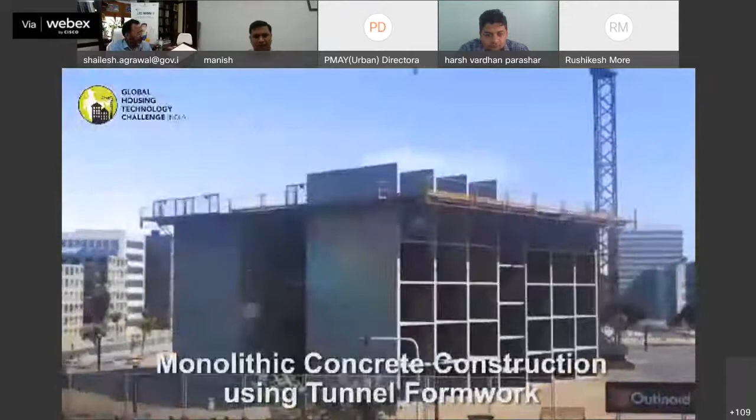Ministry of Housing and Urban Affairs, Government of India, has initiated the Global Housing Technology Challenge India to identify and mainstream best available global technologies so as to bring a paradigm shift in the construction sector. 54 innovative technologies put in 6 broad categories were shortlisted during the challenge process. 6 lighthouse projects at 6 locations with 6 distinct technologies are being constructed. The lighthouse project using monolithic concrete construction technology with tunnel form, consisting of 1144 units in S+13 configuration, along with all basic and social infrastructure facilities, is being constructed at Rajkot in partnership with the State Government of Gujarat. The Honorable Prime Minister laid the foundation stone of 6 lighthouse projects, including at Rajkot, on 1st January 2021.

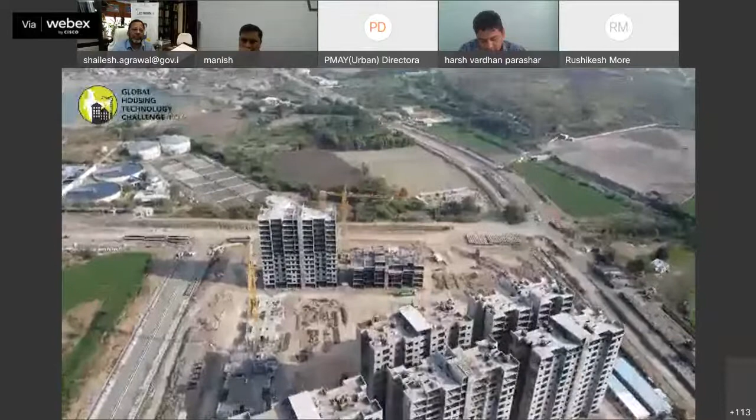Work on Lighthouse Project Rajkot has started across all 11 towers, which are now in different stages of construction. This video briefly shows the progress of this project till date, an already established system for building construction in many countries.

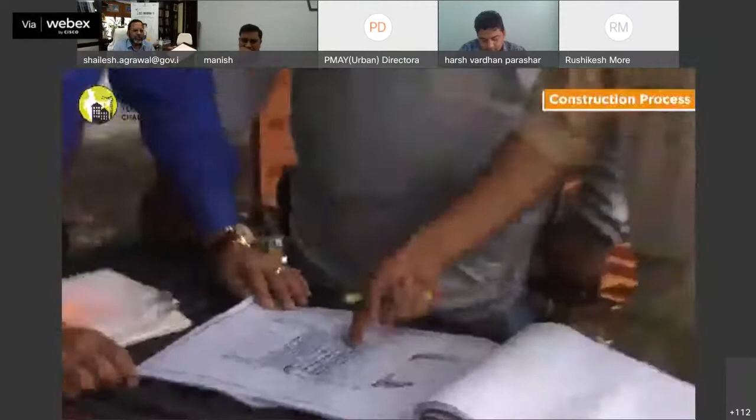Monolithic concrete construction system replaced the conventional steel or plywood shuttering formwork system with a customized engineered system. Two half shells made of steel are placed together to form a room or shell, and several such shells make the apartment. In tunnel form system, walls and slabs are cast together monolithically in a single day.

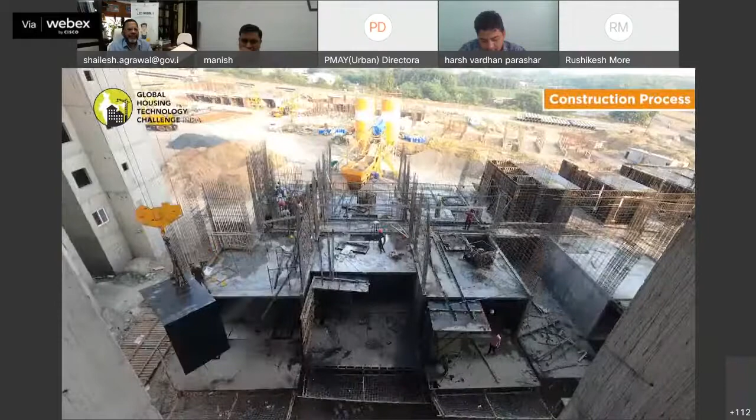Tunnel forms are used over foundation with necessary reinforcement, walls and slabs cast together using designed concrete. The sequence of construction includes stripping of the formwork from the previous day, its positioning for the current day's phase, installation of electrical and plumbing services, placement of reinforcement for walls and slabs, and then concreting.

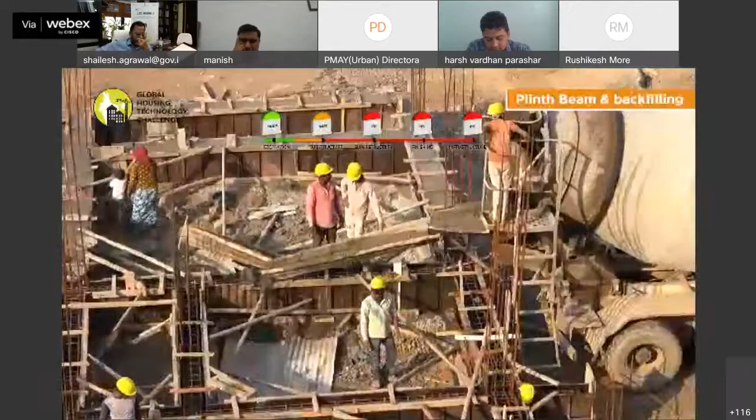Construction of LHP Rajkot started with excavation of the site, which was mostly rocky, removing boulders and soil, followed by laying of plain cement concrete, footing work, shear wall, casting of plinth beam, and backfilling of the substructure.

As the substructure was completed in a tower, superstructure work was started by placing customized sets of tunnel forms simultaneously with reinforcement and placement of service pipes as per design, and then pouring concrete to complete one floor in a day.

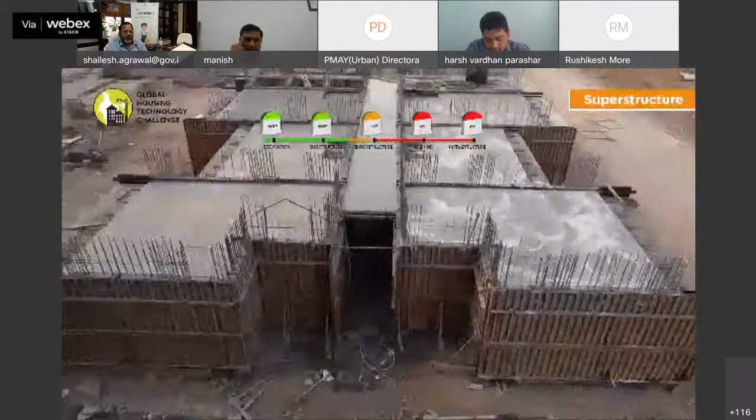Following the same process, casting of 8 out of 11 towers have already been completed, and work on the remaining 3 towers is in different stages.

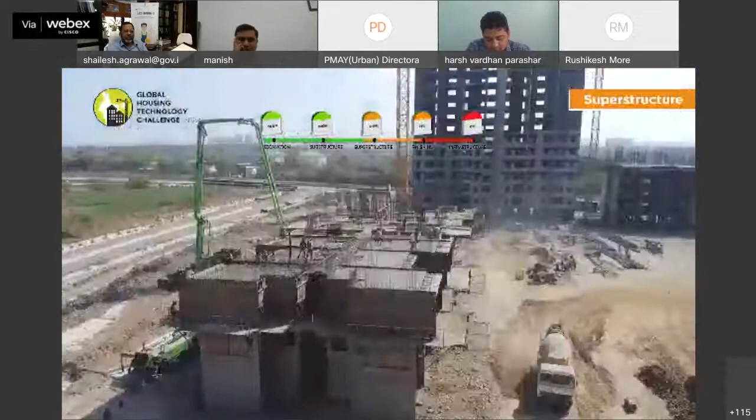While the superstructure is progressing in different towers, masonry work using AAC blocks, construction of stairs, fixing of electrical and plumbing services, lift installation, fixing of door and window frames, internal and external plasters, and painting are being done in a planned manner. Simultaneously, infrastructure works of drainage, sewerage, internal road, underground water tank, and construction of compound walls are also going on.

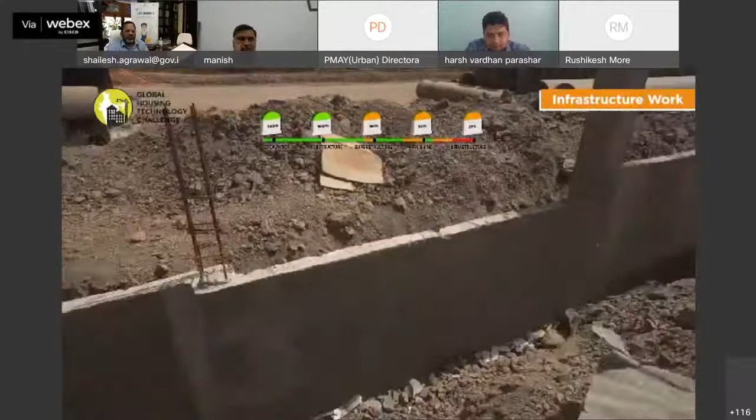Construction of social infrastructure including Anganwadi, shopping complex, and community center are also going on in full swing. A sample flat with all amenities in Tower 8 is ready for showcasing to beneficiaries and other stakeholders. With completion of about 70% of the work, the project is likely to be completed very soon for handing over to already identified beneficiaries.

The Lighthouse Project Rajkot is serving as a live laboratory for learning and knowledge dissemination. About 300 Technograhis and other stakeholders have visited the site to learn the use of innovative technology in a real project at site.

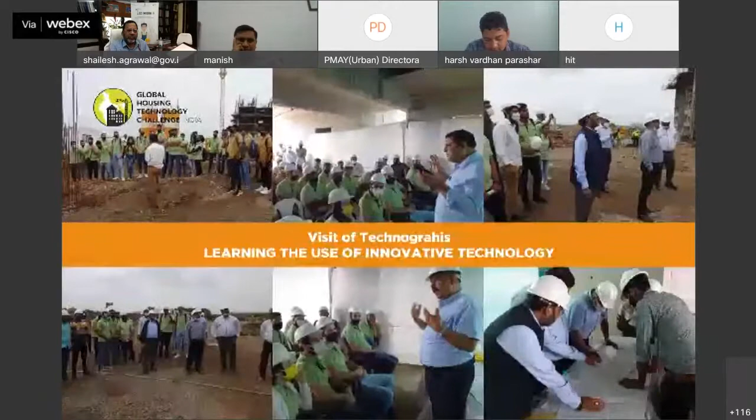Thank you, Manish. And I think you might have got the idea of the technology here. And two words are being repeated in this video.

One is monolithic and another is tunnel form. It's a customized formwork which is made in the factory, so we will be showing you the manufacturing process as well. Monolithic means the walls and slab are cast together, so that is why it is called monolithic concrete construction.

And this is excellent as far as disaster resilience is concerned - earthquakes and cyclones and other things. Now, I will ask the nodal officer, because for each lighthouse project we have an expert from BMTPC. Yeah, Manish, you want to say something?

Sir, do you think we should show the film of the casting yard also? It's a 2-minute film. Let me ask Jha - do you want to show it later or right now, Jha? Planned, sir, after my presentation, but if you want to show it now, we can. Just for continuity, Manish, once he makes the presentation, then he will show the technology, then the casting yard, and then the manufacturing process and all those things.

I just wanted to make a point that it is called monolithic concrete construction. So please bear in mind, monolithic concrete construction means the walls - otherwise you have infill walls of bricks and all. Here the walls are RCC shear walls, and those walls are being cast with the slab, so there are no joints. This is called monolithic concrete construction, which is excellent as far as earthquake or seismic resistance is concerned.

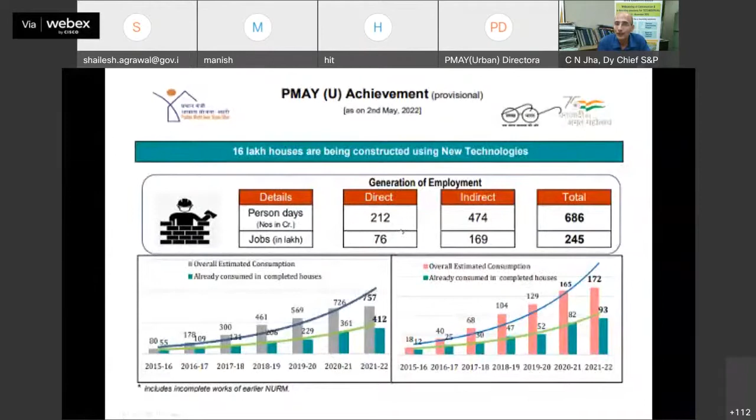It has created huge employment also. 686 crore person days have been created, out of which 212 is direct and 474 is indirect. Similarly, 76 lakh direct jobs have been created, and 169 lakh indirect jobs have also been created.

It has contributed to economic growth of two primary industries, cement and steel. About 412 lakh metric ton of cement has already been consumed in houses presently under construction and completed, and it is expected that once all 122 lakh houses are completed, 757 lakh metric ton of cement would be consumed. Similarly, 93 lakh metric ton of steel has already been consumed, and it is expected that with completion of all these houses, 172 lakh metric ton of steel would be consumed. So it has contributed significantly to the growth of these two sectors also.

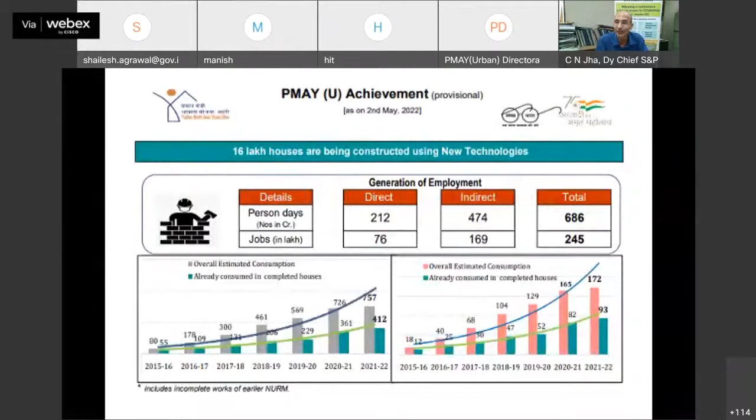Now, as we are already aware, our Ministry of Housing and Urban Affairs has taken a very ambitious initiative called the Global Housing Technology Challenge India, basically to transform the construction sector.

Using the technology from each of the broad categories, 6 lighthouse projects are being constructed. You are already aware of these screenshots of the foundation stone laying ceremony, which was held on 1st January 2021 last year. These are the actual screenshots.

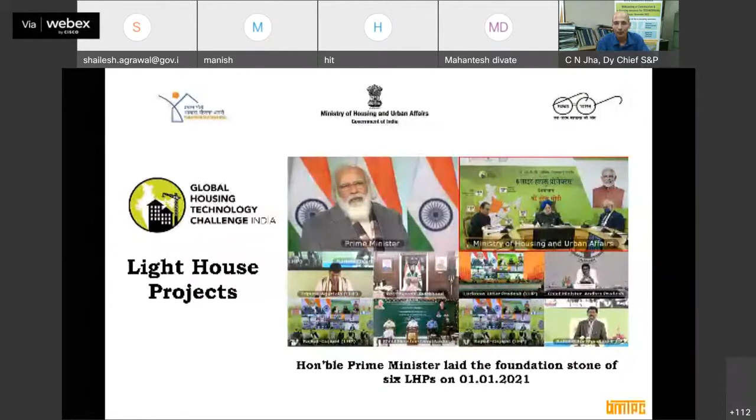Then I come to the system which we are presently following. One is the load-bearing structure. In the load-bearing structure, the wall of the building acts as a load-bearing member. The load of the slab is taken by the load-bearing wall and transferred to the foundation. However, this has become nowadays sort of obsolete.

Even under this Pradhan Mantri Awas Yojana BLC construction projects, agencies, based on the wishes of the general public, are designing houses with columns and beams, for the simple reason that once they want to go for additional upper stories, they can simply take the columns and construct further. So this load-bearing structure is getting obsolete.

The second one is the RCC framed structure. This is the main construction method in which RCC columns, beams, and slabs are cast in situ. In situ means we put the formwork, do the reinforcement, put the reinforcement, and then pour the concrete in situ. This is the most prevalent way of construction nowadays. All multi-storied buildings, high-rise buildings, you see, 90% of those are RCC framed structures only.

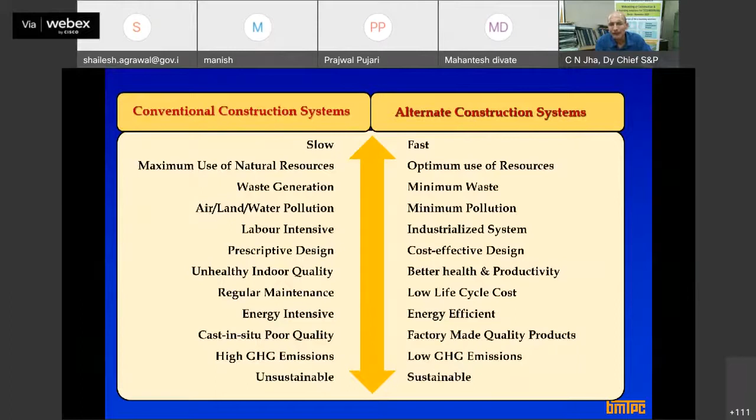Alternate construction system is factory produced or based on a casting yard at site which produces components. The underlying fact is that since there is use of a factory or casting yard where a better, regulated environment is there, there is scope and potential for producing better quality products. In the conventional construction system, since everything is done at site only, it is very difficult to monitor the entire site with that kind of control, and even the quality of masons is not of good order. So these two things define the conventional construction system and the alternate construction system.

In the conventional system, we have maximum use of natural resources. It is primarily sand, aggregates, cement, water, and burnt clay bricks.

Against that, in this alternate construction system, the entire walling is replaced by either sandwich panels produced in the factory, or through engineered formwork and precast concrete components. So the entire walling system is replaced with factory-produced components.

These factory-produced components, some of the sandwich panels, use alternate materials also like polystyrene particles as a substitute in the manufacturing of lightweight concrete. So those kinds of things are also used, similarly glass fiber reinforced gypsum panels and all.

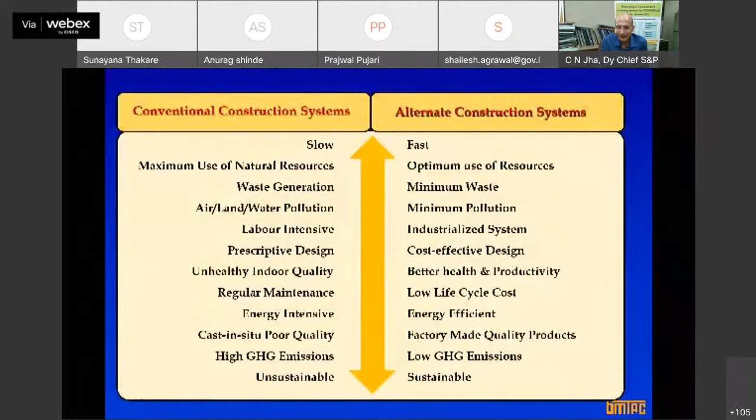Low GHG emission - if energy is lower, then proportionately the greenhouse gas emission is also lower. If we use optimized resources, lower energy, and minimize waste, that all results in sustainable construction as compared to the conventional one. So by design, precast or alternate construction systems are efficient and sustainable.

We now talk of 'safer' structures - safer stands for sustainable, affordable, functional, economical, and resilient. And why is this sustainability aspect so significant?

In case of sustainability, our buildings contribute about up to 30% of use of energy, 30% use of water, and 40% generation of waste out of total consumption of energy, water, and waste. If we go for sustainable construction, there is vast potential for reducing energy use, up to 30 to 50%. Meaning if it is 50%, the energy available today can be extended for double the duration.

Similarly, water has the potential to reduce by 40%. This 40% reduction in water use can extend the life of our existing potable water reserves.

Now I will talk of the 6 broad categories of technologies which have been shortlisted. The first one is this modern technique, the most advanced technique, being implemented at Ranchi. We are replacing the entire conventional system with this customized factory-made volumetric construction, where the entire module is cast and erected.

The process involves this mold. From the mold, this component has been produced. The component is transported to the site, and at the project site itself, it is erected through tower cranes and all.

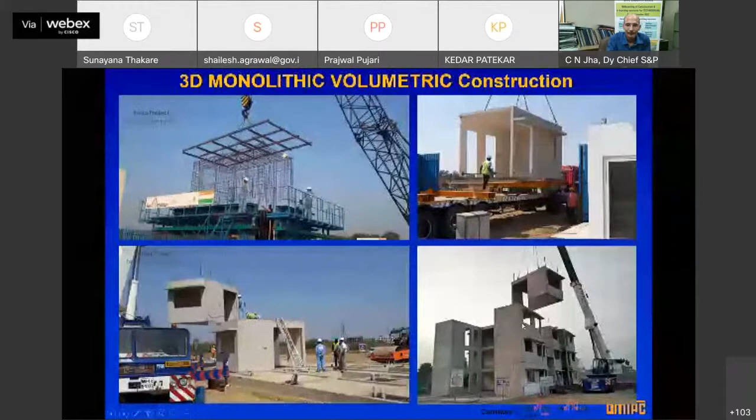Under this category, like GHTC, there were 4 such technologies along with the technology providers, so they were shortlisted. At Ranchi, this technology is being implemented.

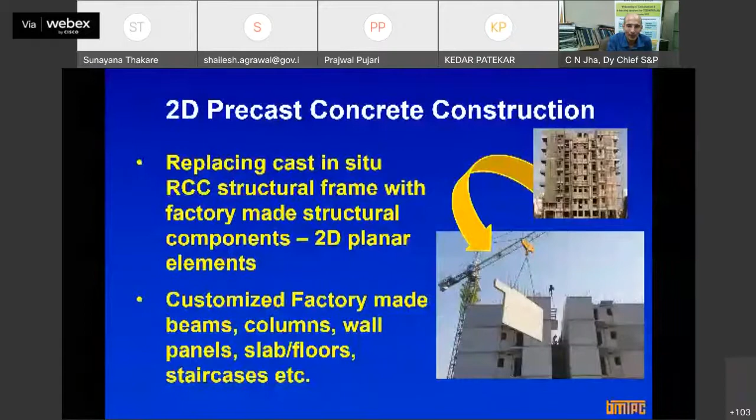The construction system - there was scattered use of this 2D construction system by L&T and Shirke, but this is also one of the broad categories in which individual components, not the entire 3D, but individual components like wall, slab, and staircases, are produced in the factory and are transported, erected, and joined in situ. These are the various components which are assembled at the site.

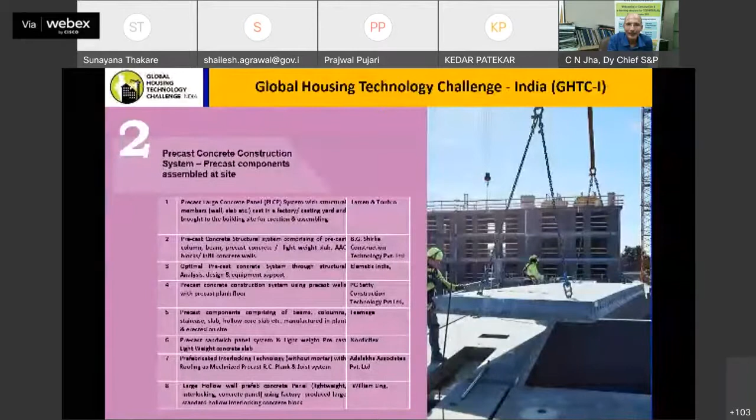There were a total of 8 technology providers shortlisted under this category of 2D precast construction system. This is being implemented at Chennai, and I am happy to say this project is almost complete, on the verge of completion.

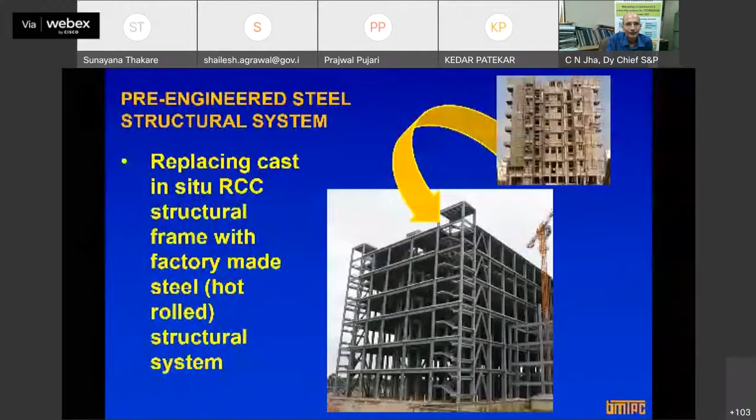Then there is the pre-engineered steel structural system. In this system, concrete columns and reinforced concrete columns and beams are replaced by steel columns and steel beams. Here you see the steel column, beam, and infill wall with aerocon panels - these are lightweight panels.

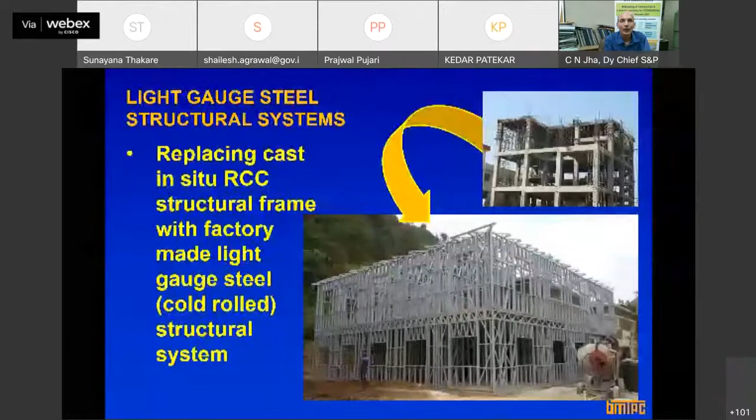Construction is very fast with these light gauge steel structures, which are very thin, made of cold rolled steel sections. There is a limitation that we cannot go more than G+3 storeys in this system. So together, light gauge steel structural system and pre-engineered steel structural system form this broad category, and there were a total of 16 technology providers shortlisted under this category.

This technology is being implemented in the LHP at Agartala.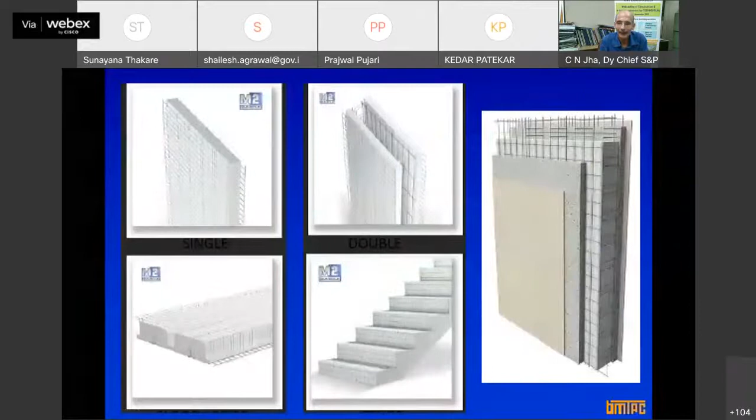About 9 such technologies were shortlisted under this category of prefabricated sandwich panel system. In the LHP at Indore, the steel frame is a hot rolled steel section, and the Rising Japan sandwich panel is being used as infill wall.

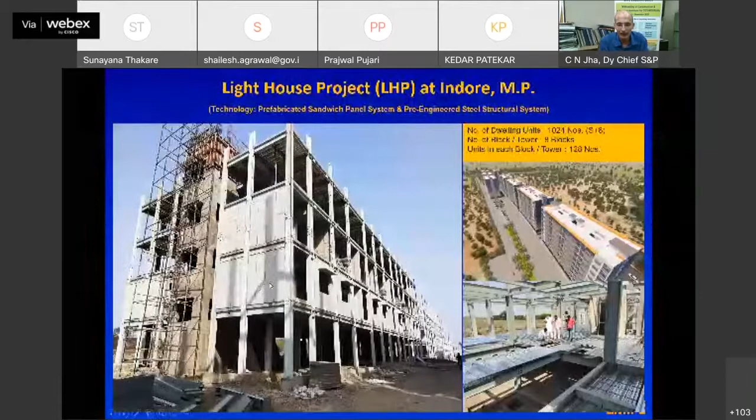These infill walls use EPS granule balls to produce lightweight concrete, and this lightweight concrete is between two fiber cement board panels or silicate panels. This makes the walling very light and very high in insulation value, which helps in reducing the operational heating and cooling cost of the building.

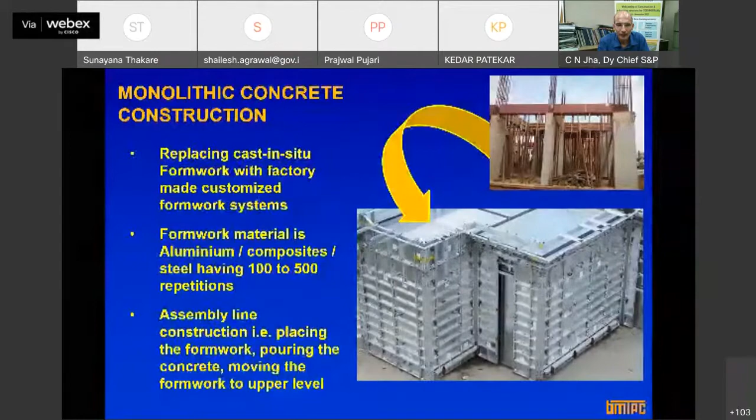Initially, these panels were manufactured by a firm in China, but now two plants in Nagpur and Pune have also been installed and are functional. The next one is the monolithic concrete system - I will cover this separately, subsequently. This is like the tunnel form which you have just seen in the movie.

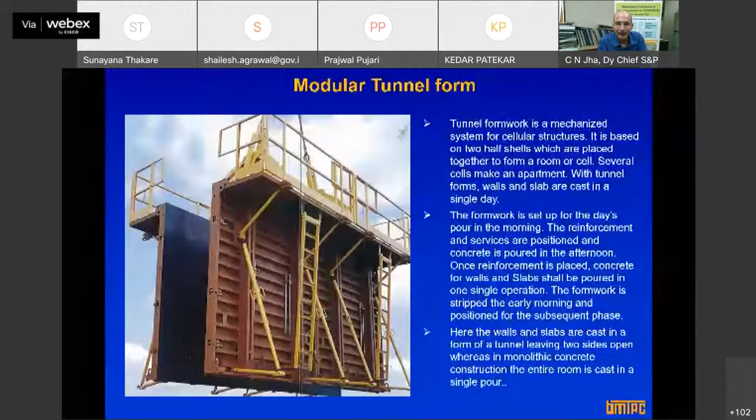I will talk about the last system, the stay-in-place formwork system. As its name implies, this formwork system stays with the building only. Unlike the normal shuttering and formwork system, or even the engineered system, this formwork system stays with the building, and inside, reinforced concrete is generally poured.

You can see the cavity here. This is like walling with this stay-in-place formwork system. This is also one type of stay-in-place formwork system where the two outer panels are with steel cages.

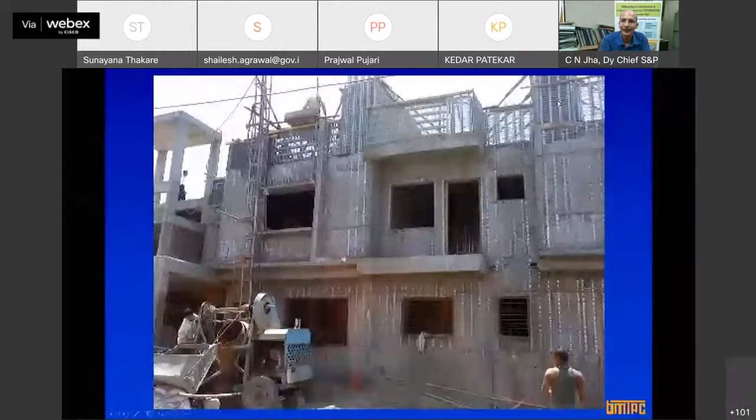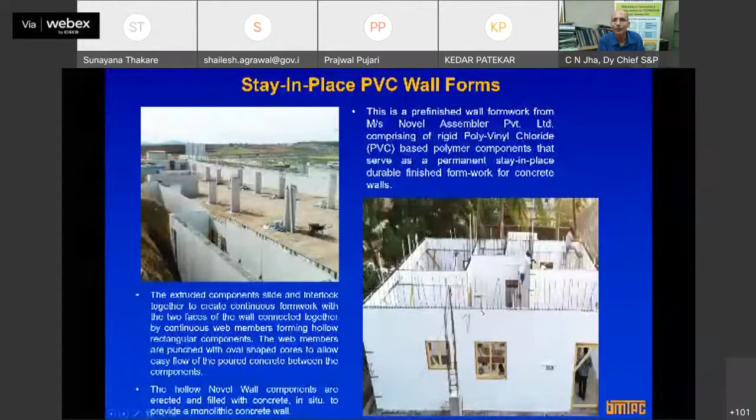This LHP at Lucknow is being constructed using this stay-in-place formwork system, but this is a PVC system, which is a pre-finished kind of wall, and reinforced concrete is poured inside between two pre-finished outer layers. You can see the reinforcement projecting out, and concrete would be poured in, and this is a pre-finished wall.

Under our PMAY also, 16 lakh houses are being constructed using these new, alternate technologies. This is the position of coverage by CPWD, approval by CPWD, and SOR issued by CPWD on this.

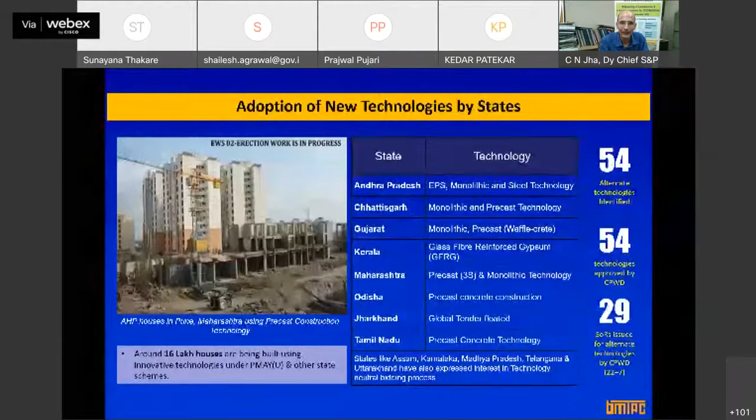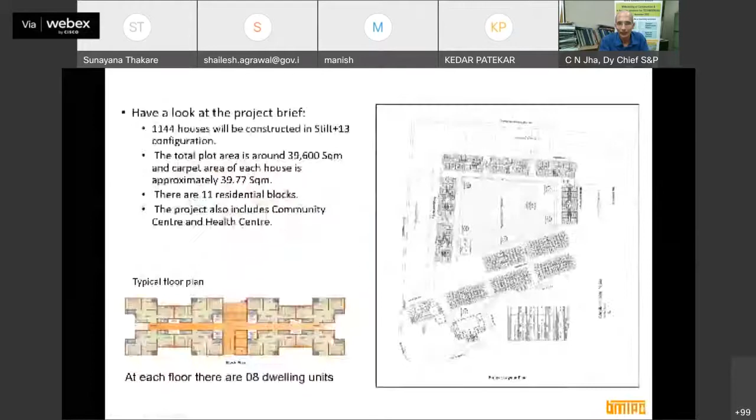The carpet area is very high, 39.77. This is the configuration of the DU, with even a study room in addition to one bedroom. The green features include STP water recycling, solid waste management, renewable resources, and solar energy, with a Griha rating of minimum 3 star.

So this we have already seen in the movie. This is 2 inverse L, which completes this formwork system.

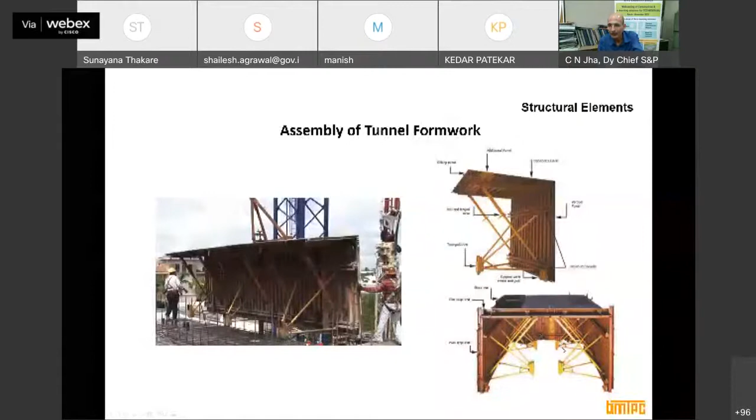As we have seen, this is the stripping of formwork, shown here being transported and getting installed. We keep the reinforcement cage ready for walling, which we put by the side of this formwork. Here you can see this reinforcement is put. Then above that, on the slab also, with the help of this concrete cover, we put the slab reinforcement, and then do the concreting in one go.

Here you can see that the ideal cycle of this technology is 24 hours. Again, when we put the reinforcement here for the walling, there are many electrical boxes and switches that have to be installed in the room. These are already welded with the reinforcement, and all the conduits are tied with the reinforcement, then they are put, and concreting is done. So this has been shown here.

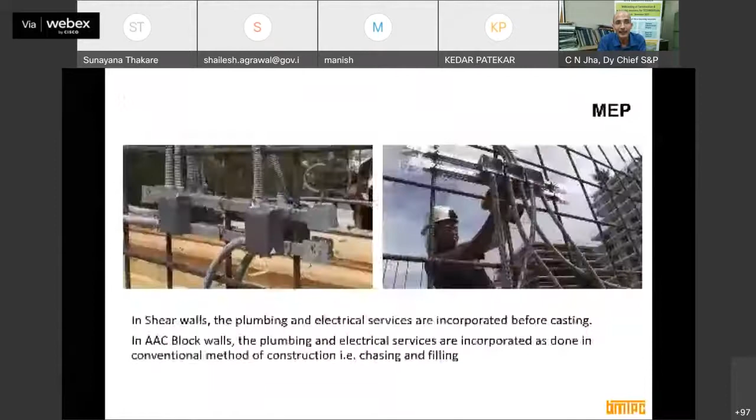Here I will do some analysis of what has been achieved. We say our ideal cycle time is 24 hours, but what have we actually been able to achieve? I will just highlight that.

Our first superstructure work started on June 21st, and it is going to be completed this month only. As on date, 1072 DUs have already been constructed. The remaining 72 DUs make it 1144, and they will be completed by about May 15-20.

So in 11 months' time, starting from June 20 to May 20, we will be completing 1144 DUs. It means 3.5 DUs per day. But this is from the start of the superstructure work, which was June 21st. Before that, the foundation was completed in many blocks.

If we talk of the cycle, the ideal time is 24 hours. In this case, we are doing construction with 8 sets, which is 2 groups of sets of 4 DUs each. So total 8 DU sets have been used in the project. With these 8 DUs, 143 repetitions have been made, and with this we have achieved a cycle of 2.3 days. Not bad - 2.3 days can be considered reasonably good.

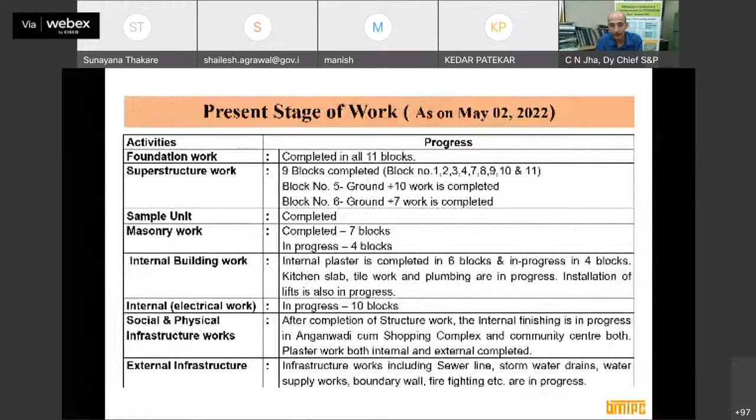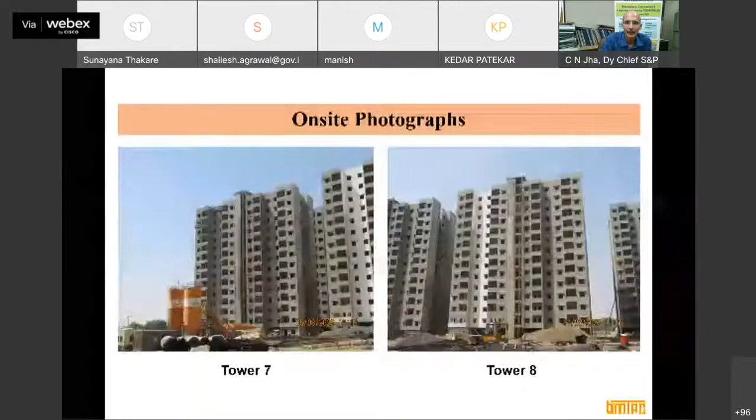This is the actual photograph, like what we saw initially. So this is now, in fact, as of May 4, 2022. This gives an impression that the building is almost in the completion stage.

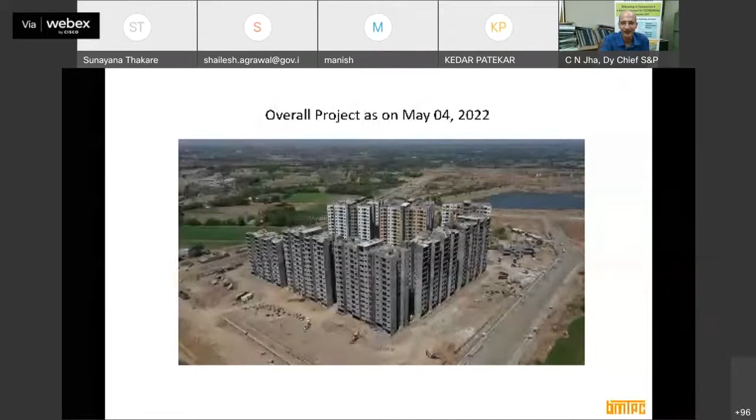Next, should I upload this casting yard? Yes, yes, Jha sahab, you can upload this one. Okay.

So now, are you able to see? We are not able to see the video. Okay, okay, just a minute.

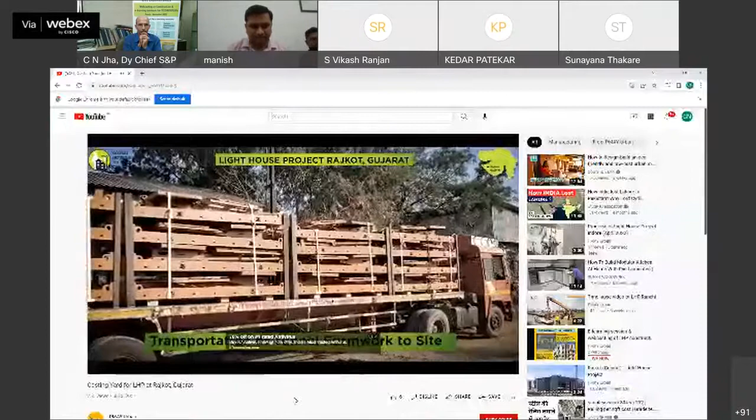Do you want me to play it again? Please. Yeah, sir, you want me to play it again? I have the better quality video.

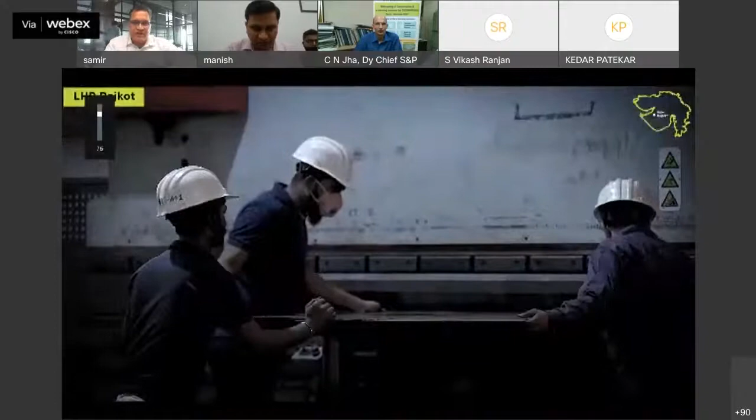This is an overview of our factory in Pune, where we manufacture the tunnel formwork system. From here, we are not just doing manufacturing for India, but that's how these separate components are manufactured. The whole process is controlled to give us precision. This is an overview of how the components are being painted so that they withstand weathering conditions.

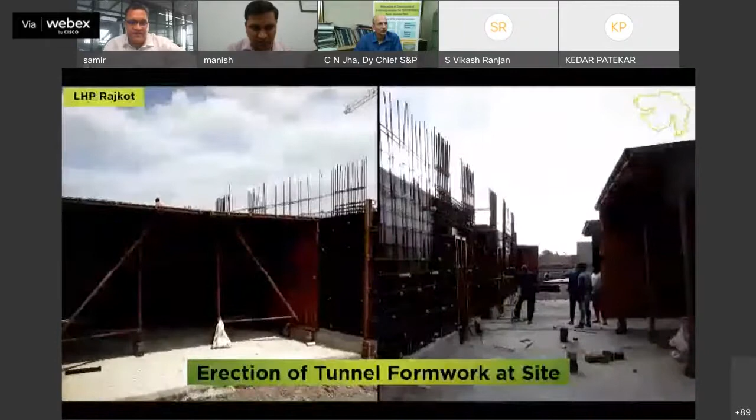I hope everybody is able to hear what I'm saying. That's how the panels are loaded onto the truck and then they arrive at site, where they are assembled. Once the assembly is done, they are put up in a location for us to take the casting.

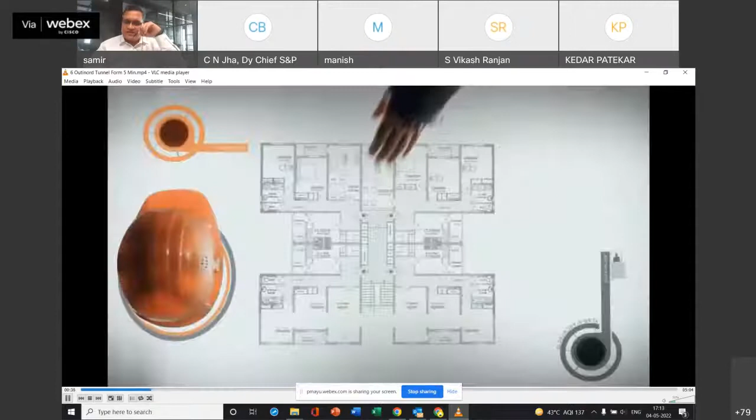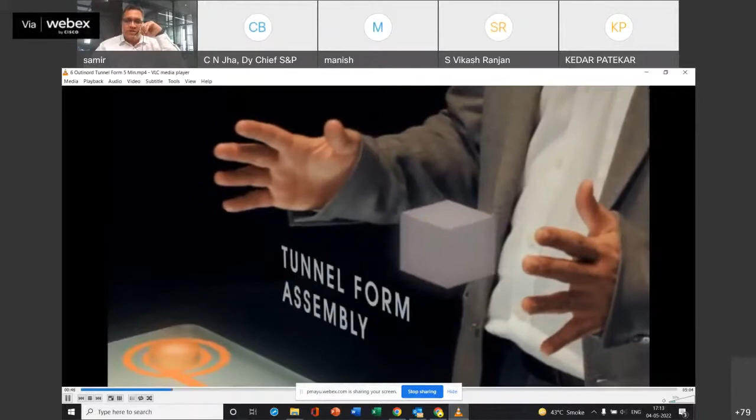We start with the architectural drawing as the basis for design. Before that, we do a due diligence or feasibility report of the layout to make sure the project being considered is fit for using a tunnel formwork system. Once we've done an analysis like that, and if the project is suitable, we come up with a tunnel formwork layout to address the design needs of the layout.

This is typically how the tunnel formwork is made. You have two L-shaped profiles which combine together to give you a tunnel. We call it a tunnel, but it can also be referred to as a room form, wherein you are casting a room.

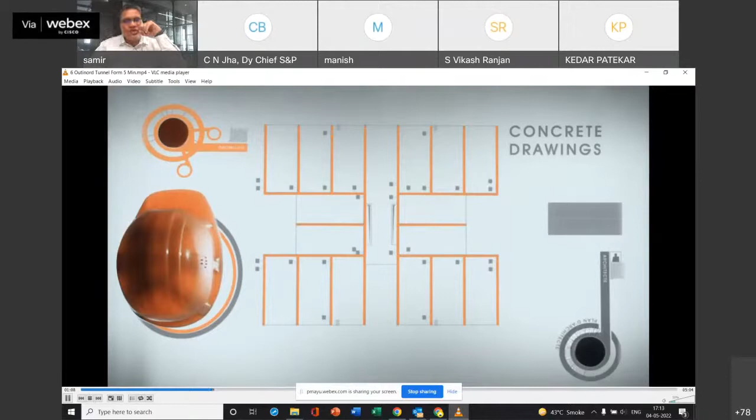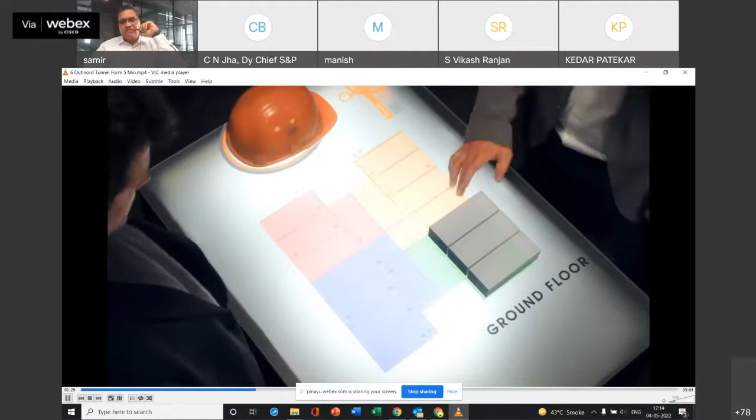So this is how we identify an architectural layout and see what walls and slabs we are going to cast using tunnel formwork. Then we divide a floor into a number of pourings, so that at a time you are only doing a certain number of rooms, so the amount of components you need to deal with for a single pouring or phase remain controllable, in terms of where I can ideally go for a one day cycle or a two day cycle achievement.

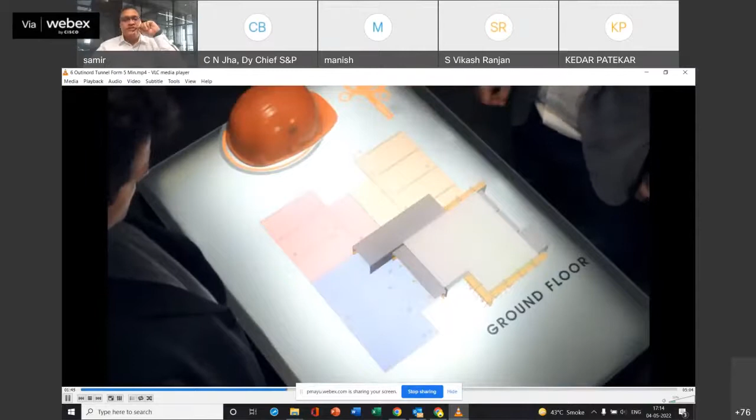All our components are made in high carbon steel, and the average weight of the components goes up to about 100 kilos per square meter basis. So you need to have some kind of mechanical means.

So typically for structures at a single place like a residential apartment, you end up using a crane. We of course also decide what capacity crane needs to be used depending on what is the size of the tunnel formwork we will be using, the maximum size.

And then with that calculation, a tunnel formwork is made for each pouring. Now here you can also see how working platforms and site platforms are introduced for ease of construction, typically all the more when it is a multi-storied apartment kind of construction where safety becomes a concern. So you have a very safe platform of 3 meter plus minus size all around the building, which gives you that safety.

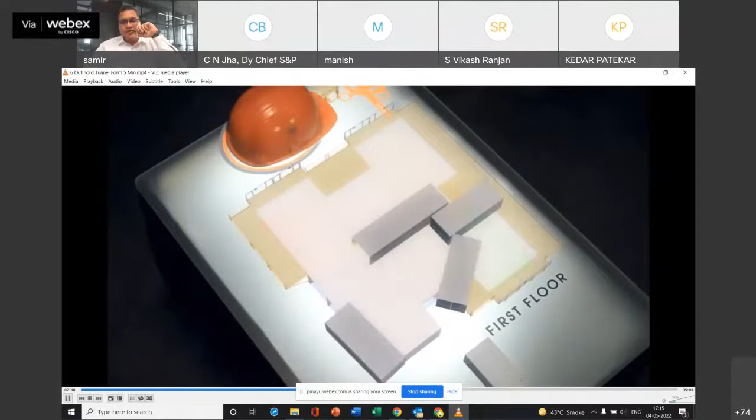So with this thought process, we continue on a daily cycle. Now I will explain to you the actual daily cycle. So as there are these two L-shaped components of tunnel formwork, right?

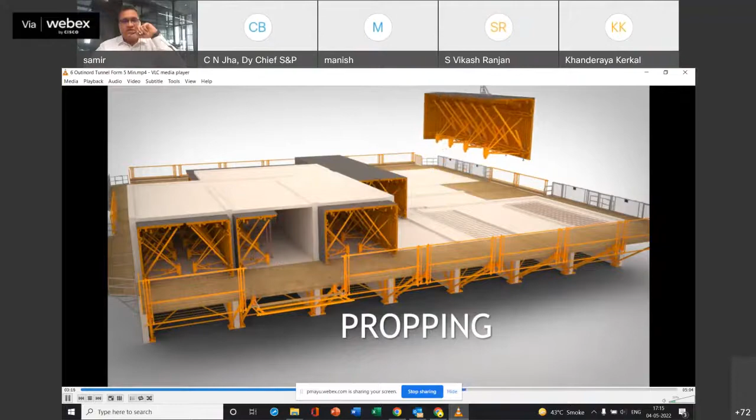Out of that, we first start striking only one half of the tunnel, and we start stripping, and after that we do repropping of the slab. The repropping is done to keep the slab supported, and then the tunnel is picked up and taken to the next phase where we need to do the pouring. For the next phase, we already have the wall steel tied in place, along with all the window cutouts or door cutouts, the detailing which is going to come in, all your electrical fixtures, everything.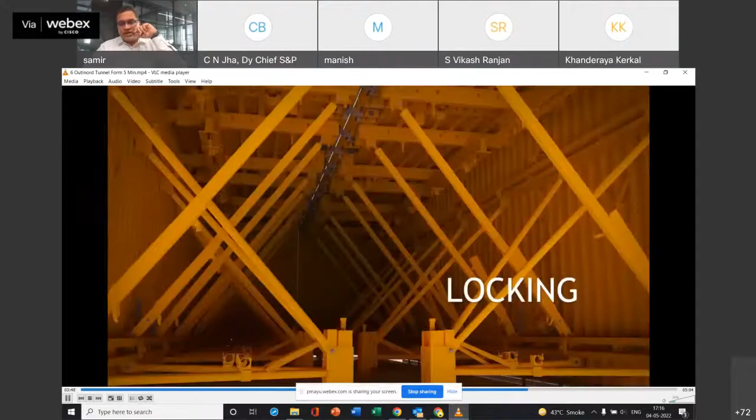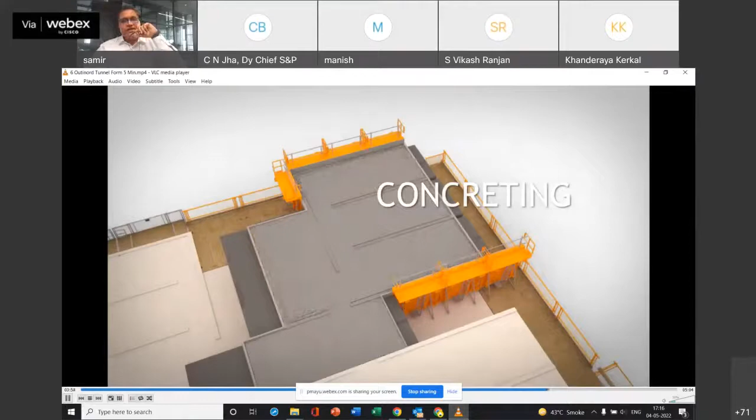Once all that is done, you bring your second component, the second L of the tunnel or room form, into place, and then you're introducing your box outs. This shifting of components, or packages as we call them, is done using a crane. Then you tie your slab steel in place, and you get your concrete in place. This is the simple process which is repeated a number of times to get the desired result.

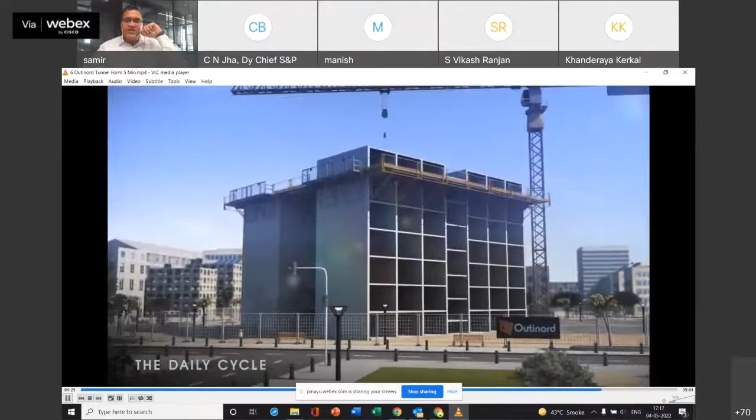Just to give you an idea, at the Rajkot site, as Mr. Jha mentioned, we've been able to achieve a cycle of about 1.25 days per pouring, and an overall cycle of 2.3 days per floor. That is the kind of speed and efficiency that we can achieve on a tunnel formwork system.

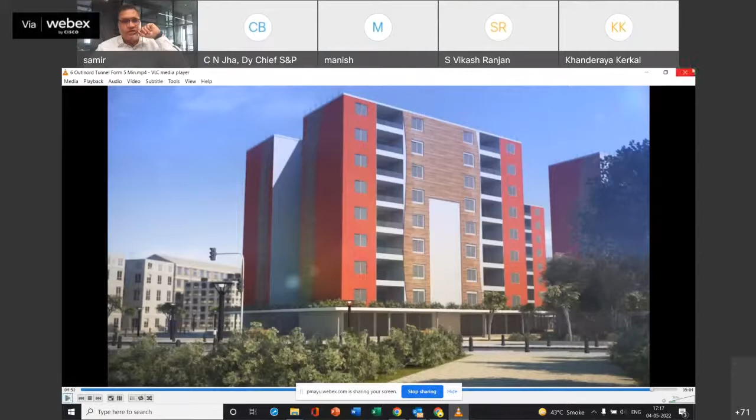If time permits, I would like to show you some of the daily cycle process slides, followed by some examples of the projects we are doing worldwide. Can I do so? Yeah, please show the cycle. Projects are not required because they want to know about the technology. Okay, so how the 24-hour cycle works. Yes, let me show that.

Okay, can you see the slide which says 24-hour cycle? Go ahead, explain. So, typical cycle starts, whenever we are targeting a 24-hour cycle for one of the pourings.

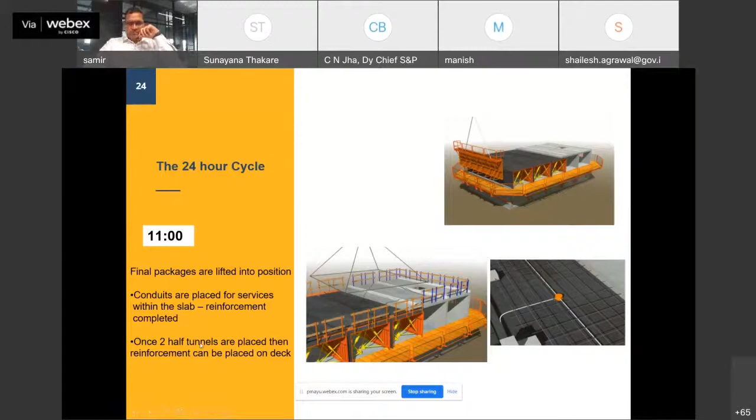Coming back to the process, once all utilities are placed within the wall, we start introducing steel for the slab portion, along with electrical conduits and everything else. Since this is load-bearing wall and slab monolithic construction, we don't have very complicated steel or large steel diameters, so it becomes very easy and fast to place the steel. Once all the steel and conduits are in place, by late afternoon we are ready to start concreting.

Once that's done, we start concreting, filling up the walls first, and once all walls are filled, we use concrete for the slab. So walls and slabs are cast together in a single go. We then use vibrating equipment like needle vibrators to make sure concrete reaches all nooks and corners, especially around door and window cutouts.

Once de-shuttering happens, we get a good quality concrete surface, and with fair face finish concrete, we don't need to do any plastering. Typically on the external surface you can go for a texture finish with coarse painting outside, and for the inside, we go for putty and paint.

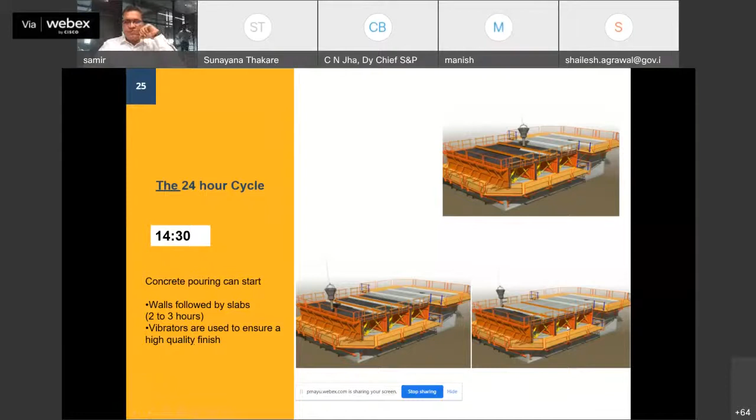That pretty much finishes my cycle for a 24-hour period. So that's how my cycle ends.

Samir, quickly tell them the cycle you're getting here. Yes, just to add, picking up from what Mr. Jha presented, the cycle for each pouring on the Rajkot project is 1.25 days, and overall we get a 2.3 day cycle for the floor. In totality, we finish a stilt plus 13-story apartment building in about 35 to 40 days. That's the speed with which we're able to achieve this cycle.

So in 3 days, your built-up area is around 8 units on each floor, that's 240 square meters in 3 days. And an 11-story building, a 13-story building, is done in about 40 days. Okay, that's wonderful, thank you Samir.

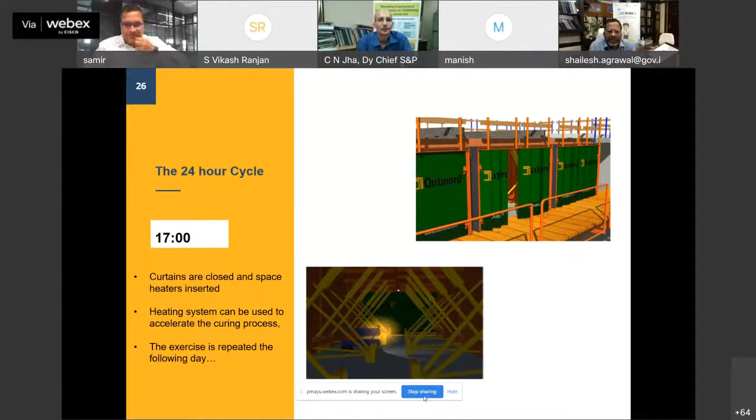Just wanted to add that you have been able to achieve 2.3 days, not 3 days, despite all the difficulties and site disruption. Thank you, Mr. Jha, for pointing that out. Our average cycle is actually 2.3 days, not 3 days. Don't get into decimals.

And 30 hours is the highest you have achieved. Yes, 1.25 days. Let's say 3 days only, let's not bring it to decimals.

Okay, so now let's take a virtual tour. Manish, if you can help them out. Sir, we have shared the live feed from the site.

Jignasu, if you are available over there, please explain the technology. There is nothing to see in this view, if you can show it differently. There's nothing to see here now, take it up inside so that we can explain. Who is operating the video camera there?

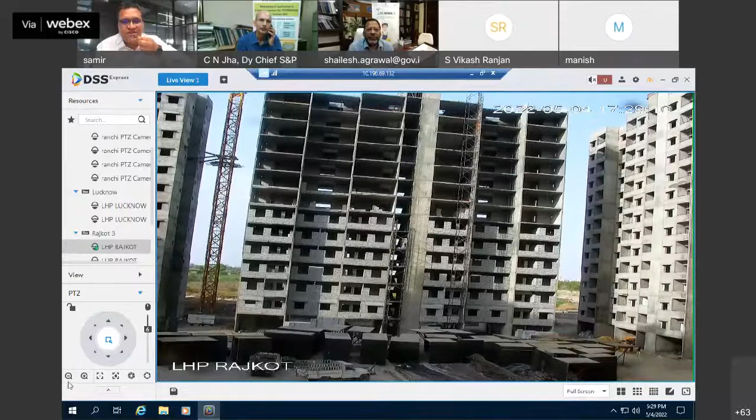See what you see, Samir. Would you like to explain or shall I? Yes, please explain. So what we are able to see is that the tunnel form work has already been finished for this floor.

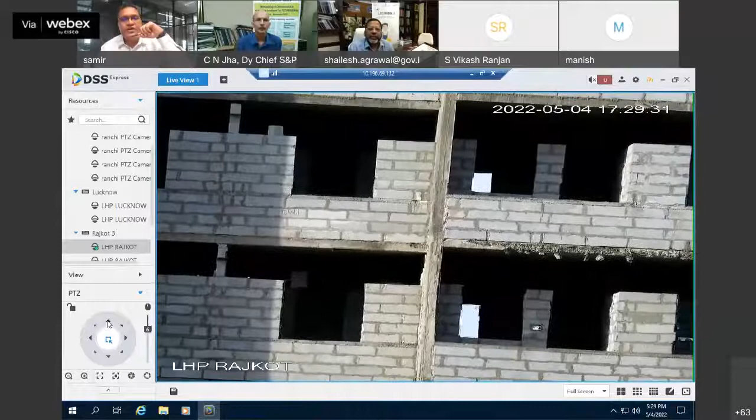When we are zooming, you can see the secondary work of facade work, which is being followed from the floors coming from below. So you can see a zoom of the facade work which is being finished. Typically, what we depend on is doing parallel processing, so when I'm finishing my upper floors with tunnel form work, I can follow it with the secondary work of internal small walls as well as facade walls.

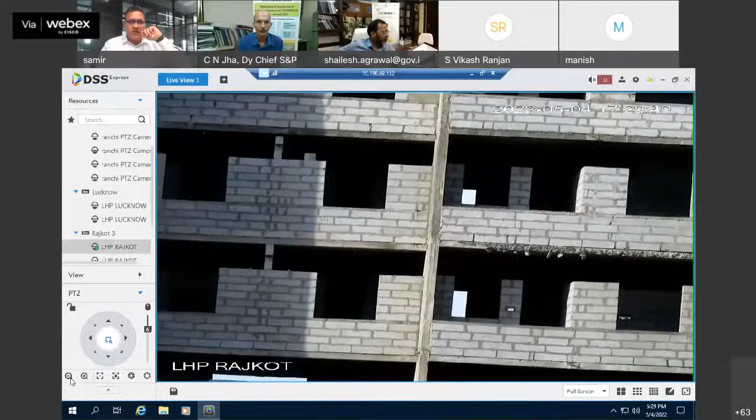In this case, because the structure is only G plus 13, we have gone for AAC block with plaster only for the facade part, since the heights are not so great. But otherwise we could also go for a precast element or cast-in-situ technology to finish the facade. The essence is that it's parallel processing: when I'm working on tunnel form on upper floors, I'm finishing all other works simultaneously, so overall you still get a time cycle in line with the tunnel form cycle we are achieving.

So you can also see some of the other buildings over here now. Is something happening on the site? Of course, they are right now at that stage, finishing the last two blocks inside, please. See what he is trying to explain to you.

This is a tunnel form. He showed you that inverted L shape. What you see now is a finished building. The earlier picture he showed is the kind of tunnel you get, and then these outer walls are filled with infill material. Here we are using AAC block, and what Samir was trying to explain is that instead of AAC walls, you can have a ready-made facade.

Samir was talking about precast concrete construction, so you can get the facade readily available from the factory and just install it. The idea here is this rectangular form being produced monolithically using the tunnel form.

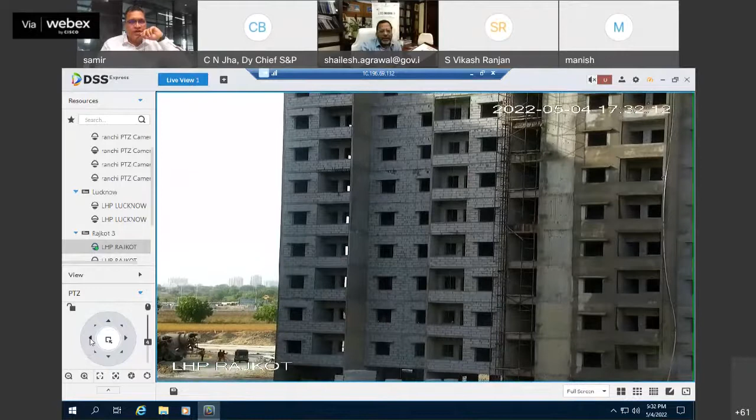Also, to pick up a point Mr. Agrawal mentioned earlier, this kind of construction, because the cross bracing happens at more regular intervals, performs best when it comes to earthquake resistance. You can see the earlier picture was without infill, and now this is a finished building where they have already done the masonry work of AAC blocks, and on the right hand side you can see the plastering has already been finished.

Again, as Samir was telling you, everything is being done concurrently - many operations going on simultaneously, like infill, services, painting, and on one side you are getting the structure erected through tunnel form. So, anything else?

Yes, and now we can see some of them are also painted. This is what we generally refer to as the industrialization of the construction process. You have one team dealing with only one aspect of the construction, so the efficiency of the team becomes much more. In one of the buildings, concreting is taking place, so they will just show the concreting part.

That's good. I think the arrangement is done at the site level. They will only operate the camera right now. Site, if you are hearing us, somewhere you are getting Hitesh, show that. If that can be put on the screens. Hitesh there at the site?

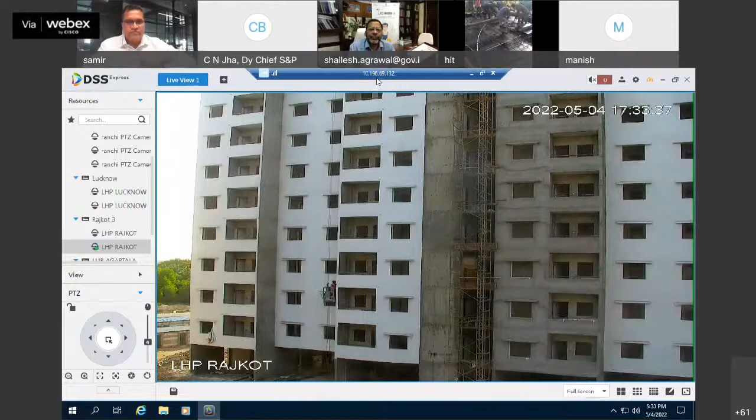Yeah, Hitesh is connected. I think if you can just show the concreting right now. Yes, so we can actually see the process of concreting going on right now.